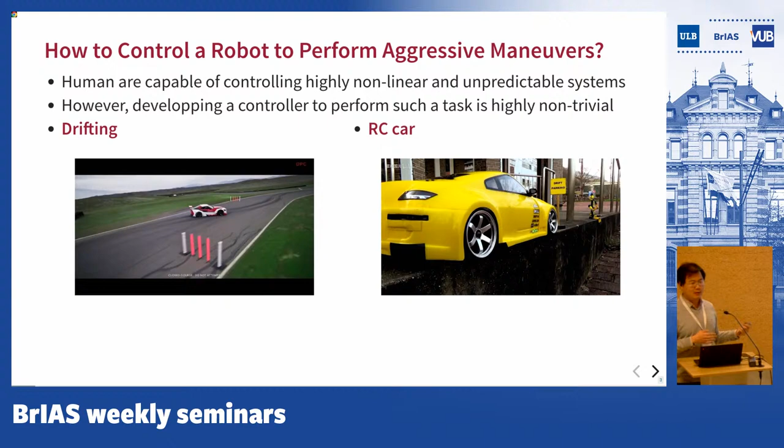We are actually interested in how to achieve this on an autonomous robot, because back in China we have collaboration with some autonomous driving companies, and they are interested in how to safely control an autonomous car on a slippery surface. For example, if you have heavy snow or an icy surface, you want the car to be controllable, not hit other people or stuff.

So if you look at the traditional control approach, if you want to have such a very agile system, the default thing we want to do is so-called Model Predictive Control.

So I can skip a few slides and give you some intuitions behind these sorts of controllers. Typically in a control task, we need to deal with two things. One is we want to minimize some cost. The cost is basically—this x is the state of the system. For example, you can consider the speed of the car and its heading, its position, as the state.

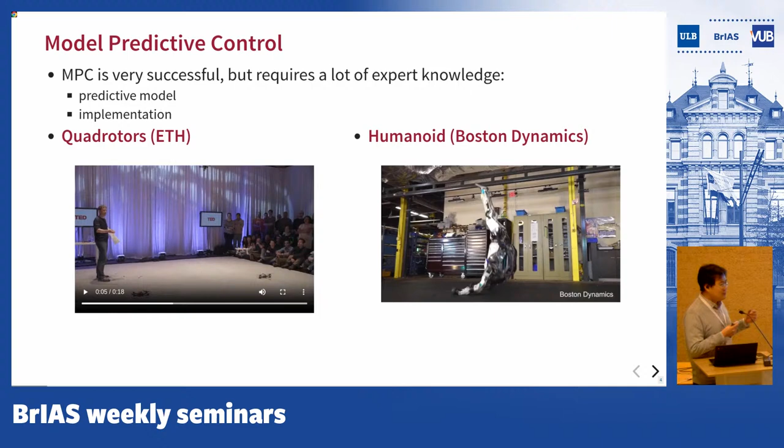Another problem is how do you implement this controller, because you are really trying to solve an optimization problem online, and usually you need to solve it at a very high speed, like 50 Hertz. So whether you can really solve a very complicated problem online in real time, that's also very challenging.

So nowadays, people are trying to move to this reinforcement learning based controller. Usually people use so-called deep reinforcement learning to learn a neural network that tries to control these kinds of robotic systems. For example, this was done by OpenAI, I think in 2019.

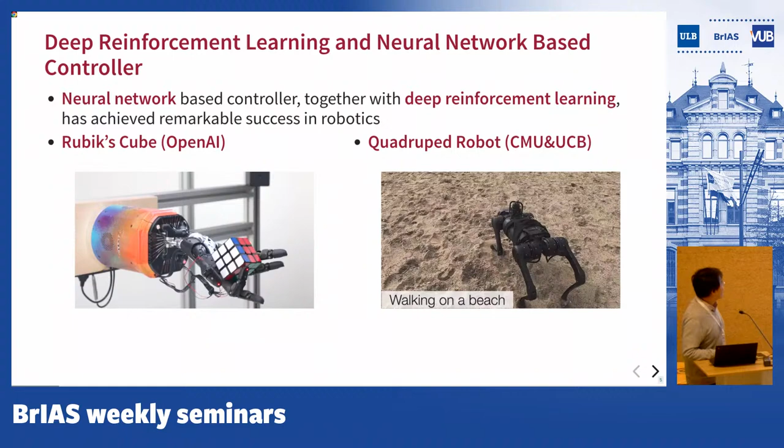For all these problems, it's actually quite challenging to solve using the traditional MPC-based approach, because you don't have a very good predictive model that can tell you what will happen next. So this is why reinforcement learning has been remarkably successful at solving all these kinds of problems.

And we actually did something in our lab. So this is what we did for controlling a car in a drifting maneuver. Here you can see we can do a figure-8 shape, and we can also do it consecutively like this.

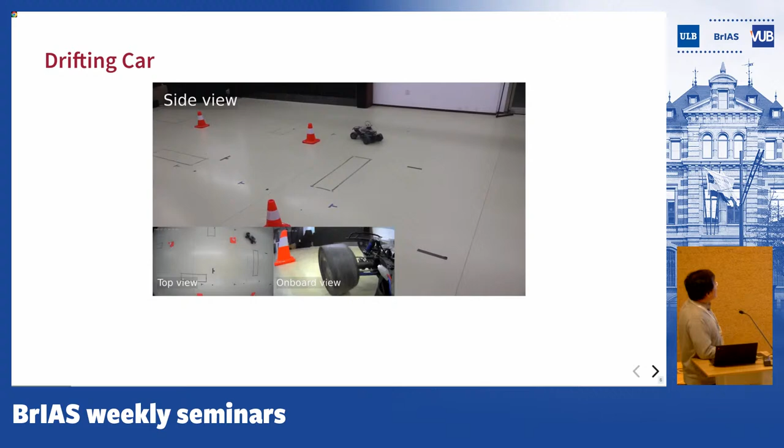And there are some other robotic projects we've gone through in our lab. I think these might be more interesting than a lot of formulas, so I'll show them here.

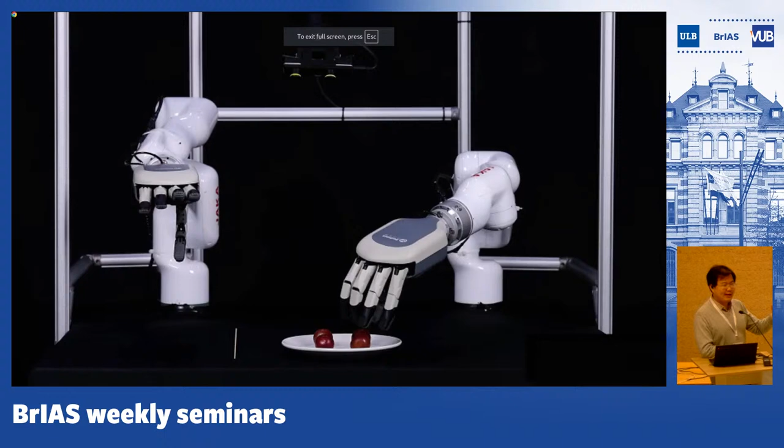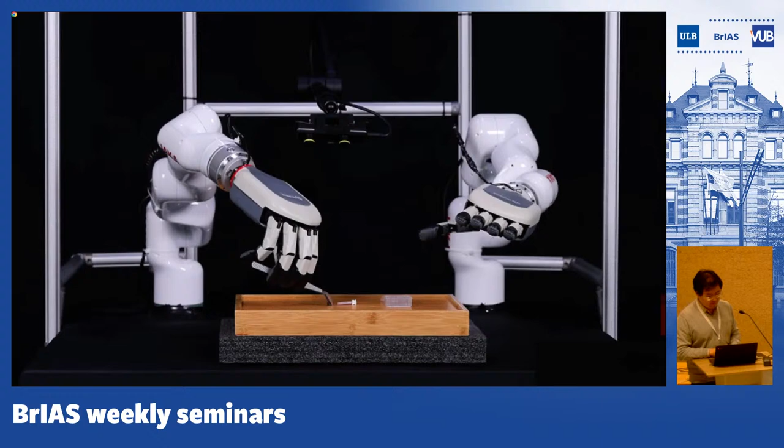We also did something with a robotic hand. This is done by teleoperation—there's a person wearing a glove and VR glasses. He sees what the robotic hand sees, and the system maps the motion of his hand to the robot hand here. We've done some projects for this kind of manipulation task.

Like I said, we've done a lot of things using reinforcement learning, and there are also a lot of other very successful stories using reinforcement learning for robotic tasks. I think people are now trying to consider why we need reinforcement learning, and there's a very good observation from a paper from the University of Zurich, which they published in Nature, I think in 2023.

The title of the paper is Champion Level Drone Racing. They develop a reinforcement learning algorithm that makes an autonomous drone actually race faster than a human pilot.

What they observe is that the fundamental advantage of reinforcement learning over, for example, optimal control is not that it can optimize better, because optimal control, as we know it, is optimal. Regardless of what problem you send it, it should give you the optimal solution. But in reinforcement learning, as we find out later, you can put a lot more objectives into the learning framework, so a lot of times it will be able to optimize a better objective. So that's what we observe.

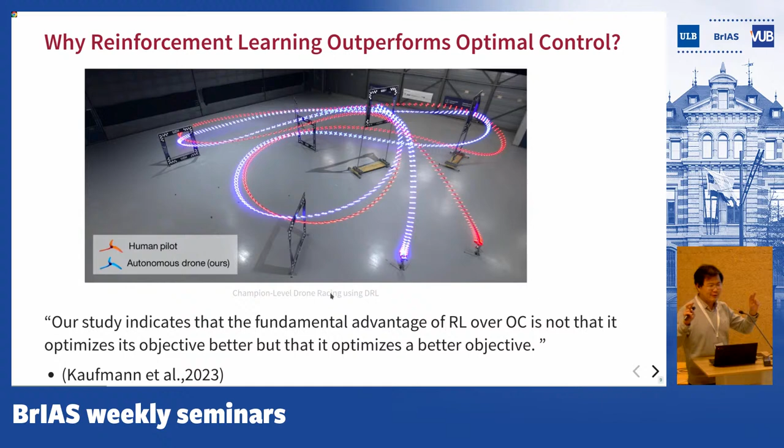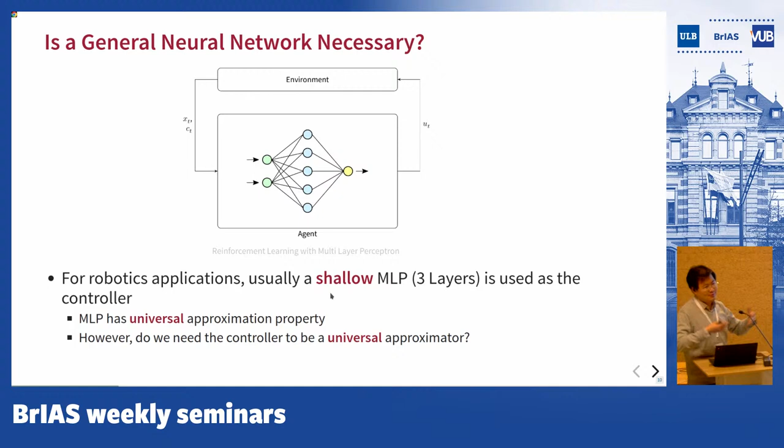If you look at all these robotic neural network controllers, they are usually just 3 layers. It's a very shallow network that people probably could train back in the 1990s. So it's not really deep at all. That brings a lot of question on whether we should really use a neural network, because it's not like a huge transformer that is doing all these control tasks.

If we go back to the control literature, we can see that people are using different terms other than learning to describe different kinds of controllers. For example, if you have a control background, you know one very famous controller called the PID controller. It probably solves 95% of all control problems. It has 3 parameters that can be learned, or you can also call it self-tuning. This was developed by Professor Karl Astrom back in the 1970s.

You can also have what we call a linear feedback controller, where my control is just a linear function — this K is what we call control gain, a linear function of my current state. There are a lot of ways to learn this kind of controller as well. And of course, there are people working on learning this so-called model predictive controller. You can think of all these things as potentially learnable: the cost function, the predictive model, the constraints, the terminal constraint — all of this you can try to learn.

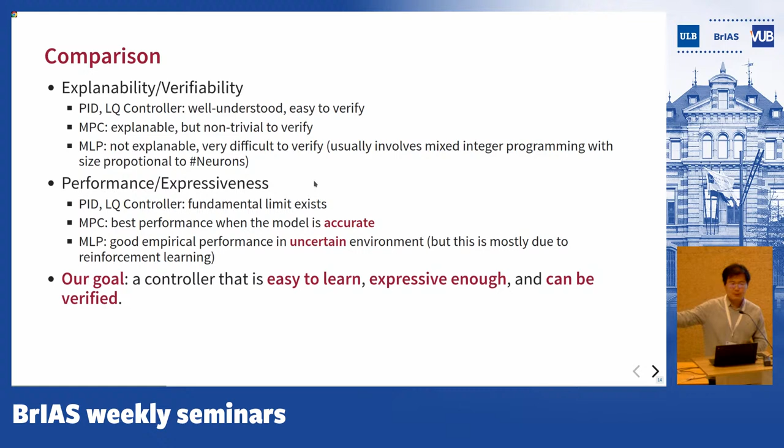So what we see here is actually there will be a spectrum of things that you can tune or learn, whatever you call it. On one side you have this very simple controller — PID, or this linear controller — that is very easy to understand, even if you don't really understand the learning algorithm. As long as they give you a linear controller, it's very easy to verify that this controller is stable or not. On the other hand, you have this so-called neural network-based controller that nobody really knows what it is doing. There's a little bit of work on how to verify this, but the complexity is really high.

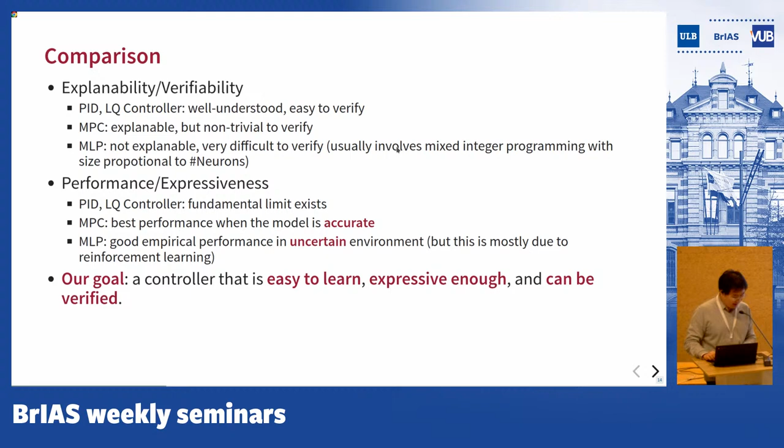So in reality, you cannot do anything about it. And there will be something in the middle, because we know all these simple linear controllers have some performance limitations — there are limitations because the control laws are very simple, so they're not expressive enough. So our goal is to say whether we can find the correct balance. This is more like a very old-fashioned machine learning approach, where you want something to have the correct structure, the correct complexity, so that it's expressive enough but not too expressive that it's very difficult to verify. So that will be the focus of our talk.

So now I have to go through some mathematics. In fact, the title of the talk is a controller inspired by MPC. So if we go back to this MPC formulation, and if you are not really from a control background, you can just think of it as a huge optimization problem.

So here, really, the thing you want to optimize is the future control input. You want to know what kind of control I need to add in the next n steps in order to

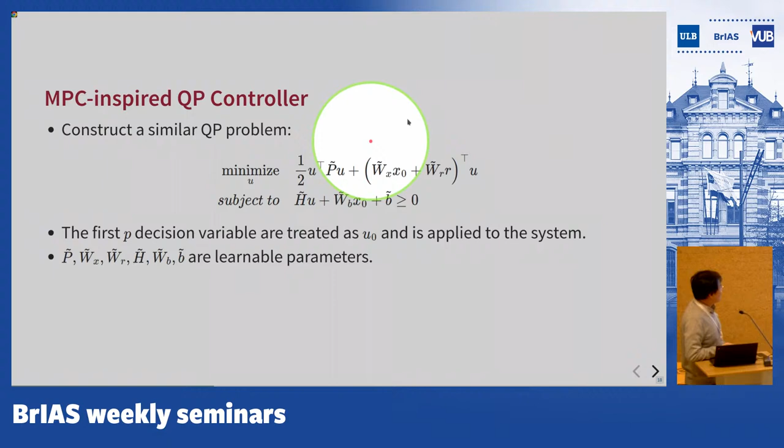And if you want to do that, what you really need to do, if you look at all the learning framework, what you really need to do is you need to calculate this. You need to basically make the controller so-called differentiable, meaning that you need to be able to calculate the derivative of my optimal u

with respect to a little bit of change in my parameters. So if I change all these P, W, B matrices by a little bit, how much will my control U change? That's the thing you need to calculate. Once you've done that, basically everything will work. You do a backward propagation and calculate the policy gradient, and yeah, everything will work as long as

you can compute this. And if you are familiar with optimization, this is called sensitivity analysis. This means how much the optimal solution of an optimization problem will change if my parameter in that optimization problem changes a little bit. And classically, if you want to do sensitivity analysis, this is usually done through KKT conditions.

Some people go through that route, but it's very difficult because, for one, if you want to find the KKT solution, it's usually very time-consuming. The other is sometimes you learn a problem that is infeasible, and at that time, this KKT condition—you cannot solve the KKT condition because the problem becomes infeasible.

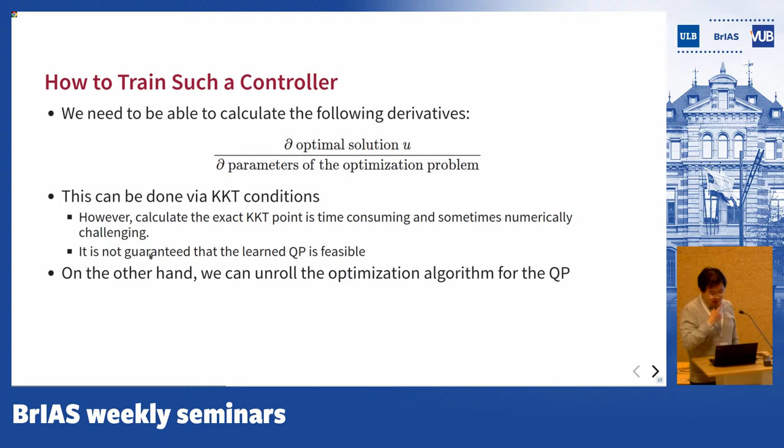So what we do here is what we call unrolling. So instead of going through the KKT, we look inside at how you solve this QP problem.

And usually, if you are familiar with the optimization literature, there are a few ways to solve the QP problem. You can do Newton's method, that's the second order method. So for example, the famous interior point method will fall into this category. And for QP, you can also do the so-called active set method, meaning that you find which constraints are active and which constraints are not.

All these other methods are a little bit more complicated, so we will be looking at the so-called first order method. Let me introduce you to a very simple method called projected gradient descent.

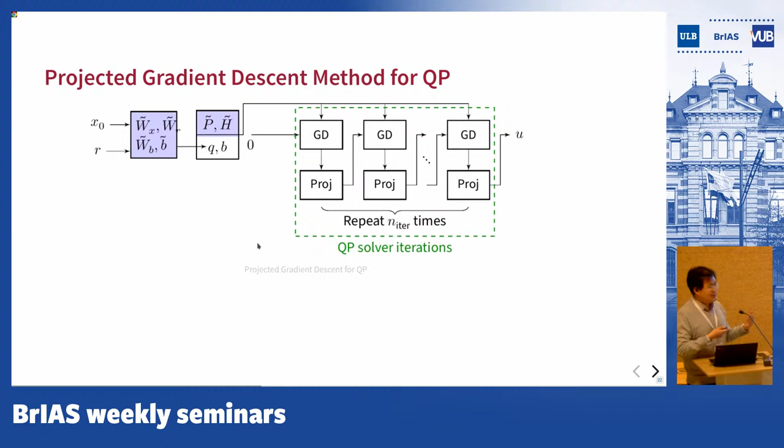So in optimization, you call it gradient descent and projection, but in neural networks, you just call it an affine layer and ReLU. You continue to do this until you converge. So this is nothing but a very classical recurrent neural network. It is recurrent because all the affine layers are essentially the same — we are doing the same gradient descent step.

So we will have something like this. Of course, this is one algorithm to solve the QP, that is projected gradient descent. But if you look at other algorithms like ADMM, PDHG, eventually you will most likely arrive at something like this — it's just that the affine layer and the ReLU layer are slightly different.

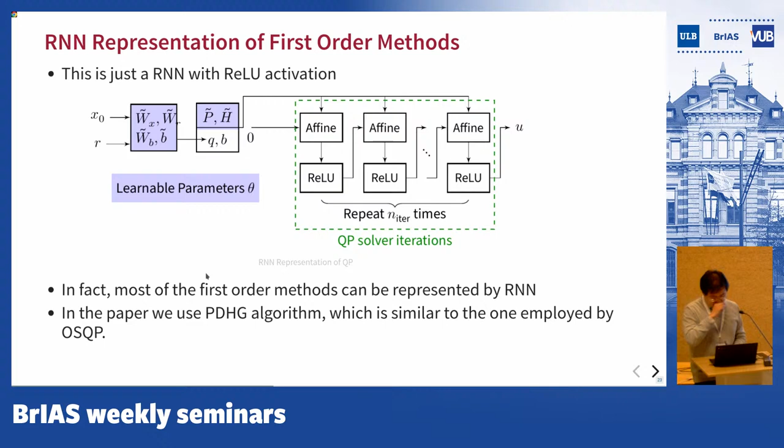At that time, we essentially get two things representing the same controller. On one hand, we say our controller is actually an optimization problem of this form. On the other hand, we say our controller is actually a recurrent neural network. It also has some structure built inside, because all these parameters need to be put in a certain way — some parts are 0, some parts are positive semi-definite, so you need to have some structure there.

These two things are more or less essentially the same thing. If you iterate for long enough such that it converges, it will essentially give you the same thing. But because we have two representations, we can leverage the benefit from both.

On one hand, this neural network, we can just throw it into PyTorch and all these reinforcement learning frameworks, and it will just work. You don't really need to write any more code to learn all these parameters, because all the backward propagation is already done by PyTorch and other learning frameworks.

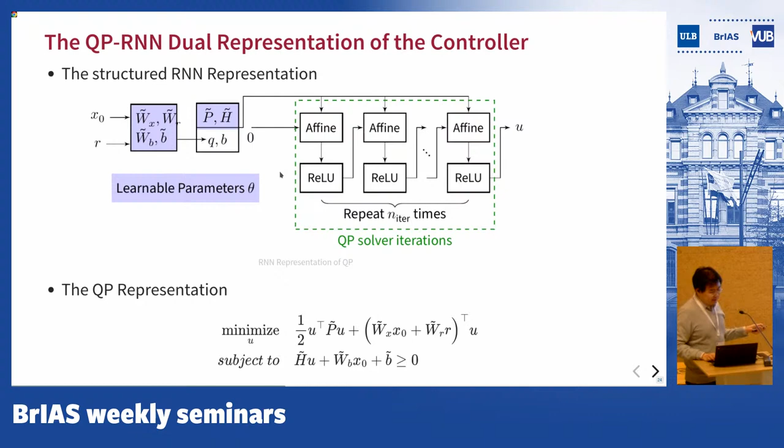On the other hand, once you have this, you can recover this QP representation. You can go back to the optimization problem saying, now I have a very compact representation of my controller, probably I can do certain things. For example, in MPC, what we care about is the verification of the controller. So that goes back to the title of this talk. If I have a very compact QP representation, what we can do is try to do certain verification. But because this is very control theoretic, I will just give you a very brief idea.

If we want to verify the controller, there are two things we need to prove. One is the controller will be so-called asymptotically stable, meaning if you start at a certain point, you will always go back to 0. That's called asymptotic stable. But because the controller is based on an optimization problem, an additional thing you need to verify is whether that optimization problem always has a solution.

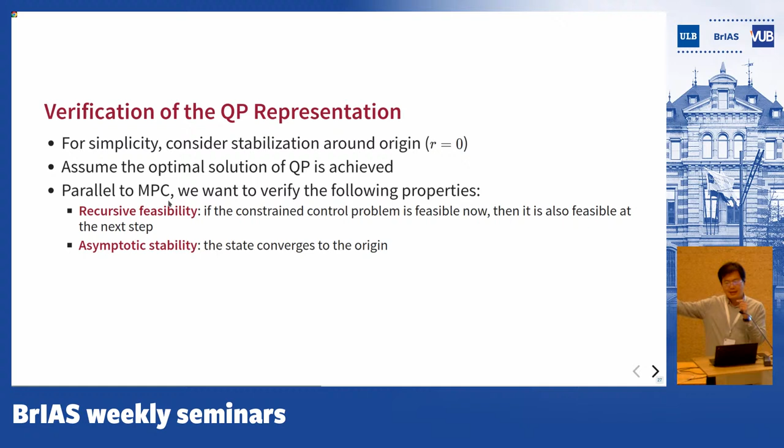If at a certain point this optimization problem is infeasible, then you run into trouble. So you'll also need an additional thing called recursive feasibility, meaning that if that optimization problem has a solution now, it will also have a solution at the next step. Then you can use induction to say this one will always be stable, something like this.

If you look at recursive feasibility, you run into something like this. Basically we want to say if the optimization problem starts within this polytope, it will always remain in this polytope, and this polytope will satisfy all the safety constraints. That's one way to prove that the optimization problem will always be feasible. So you end up with a problem like this.

This will be a non-convex so-called QCQP problem, meaning quadratic constraint, quadratic programming problem. If you can solve this problem and find the solution is non-positive, then you prove that this set will be so-called forward invariance. So you will always stay in this set, and you will always have feasibility.

I will not really go into details, but you can see that this quadratic programming representation of the control is actually quite important, because we need something like this in order to convert all the proof into a big non-convex optimization problem. Similarly, you can prove stability in this manner—you create another optimization problem based on the controller you learned, and then you can do this.

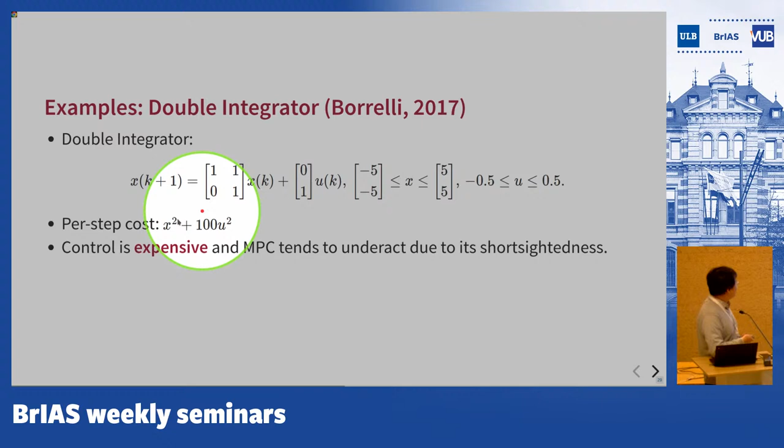You have some constraint saying that the velocity and position of the car need to be constrained between +5 and -5. You can visualize it as the car on a table, and if you go too far, the car will fall off the table. You also have some limit on how much brake you can apply—so you can only apply this amount of acceleration and deceleration. And also, very interesting in the cost, is that braking is very expensive, so you have a huge penalty on how much brake you apply.

So if that is the case, I need to introduce you to the concept that for the car, the safety region is not really this whole region. Meaning that if, for example, I'm here, although I haven't fallen off the table, maybe I'm going too fast and I cannot apply an infinitely large brake. So even if I haven't fallen off the table, I will inevitably fall off in the future. I pass some point of no return, right? So the concept is that the safety region is not really this whole table.

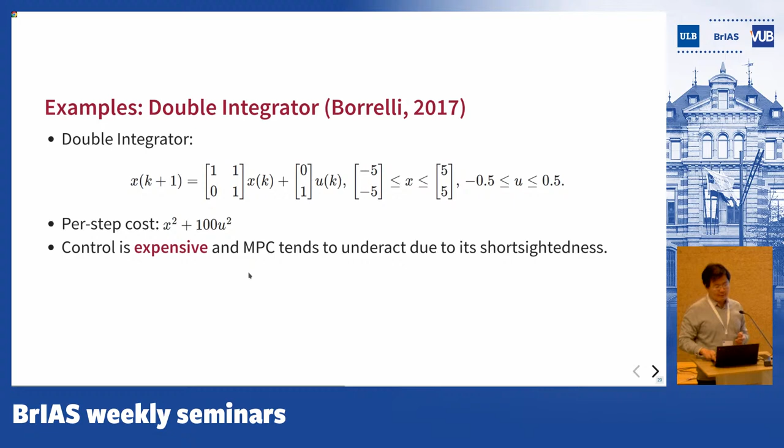So if you have a very short looking-ahead horizon, then the MPC will do something like this - even though you have some strategy to stop the car, because you don't look far ahead, you don't realize there is danger ahead, you won't hit the brake fast enough, so eventually you will fall off the cliff. That's what happened for the MPC.

But for us, because we are training this controller using reinforcement learning, and in reinforcement learning we can set a time period to be like 300 steps or a very, very long time, we are actually able to overcome this short-sightedness. So for example, even when MPC fails, we will be able to drive the car back to the origin.

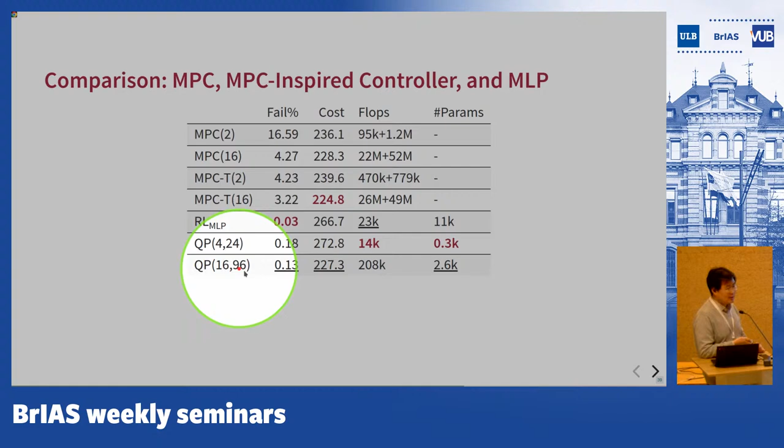On the other hand, if you look at all these learned algorithms, we use RL to learn a neural network. These are the QP controllers that we learned in our proposed QP controller. So here we have some parameters. This 4 basically means the same size problem of MPC as a 4-step look-ahead MPC, and this 16 means this QP problem will be the same as the MPC problem of 16 steps look-ahead. And you can see that the fail percentage is very small, because essentially we are looking much further ahead than the MPC, and the cost is similar.

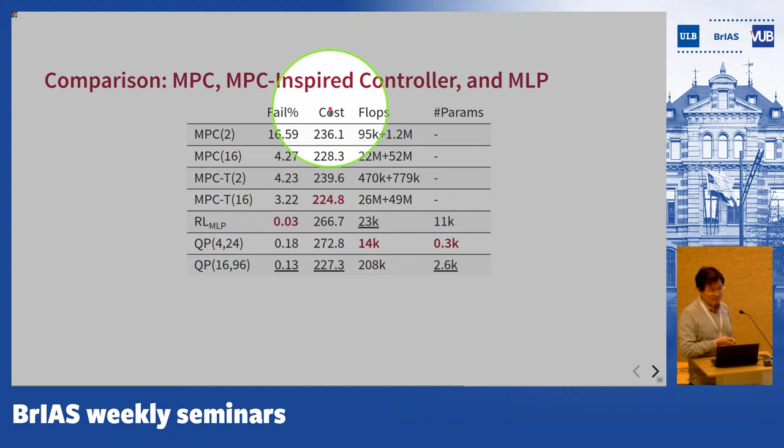So here there are some caveats, meaning that the cost, if for example the experiment fails, then the cost will be accumulated, but the accumulation of the cost will be stopped at the time they fail. So if you fail a lot of experiments, your cost will definitely be smaller, because you early terminate the whole process. Okay, so you will see that QP has similar performance as MPC in terms of cost.

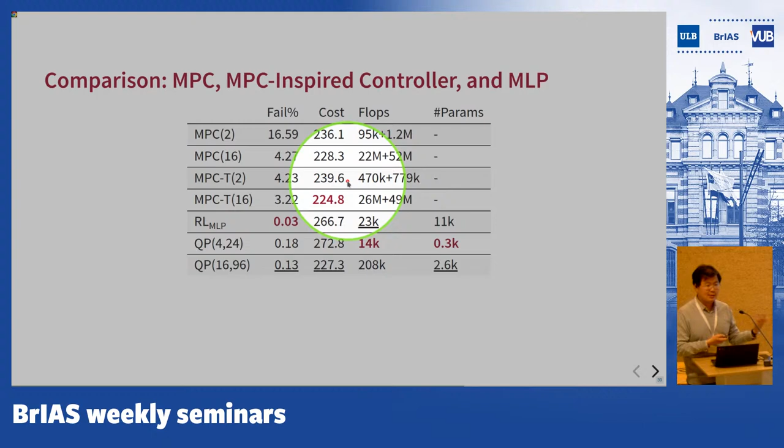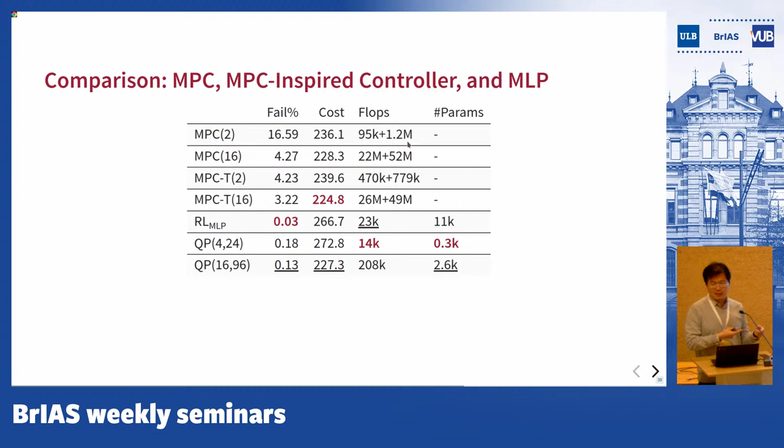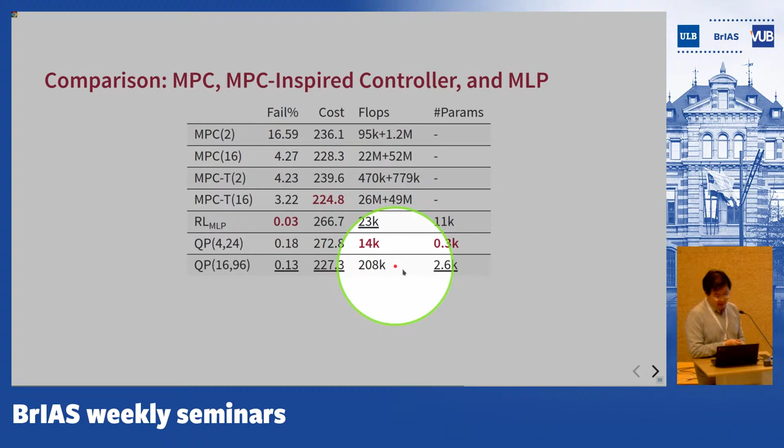But MPC, because it's solving an optimization problem, a lot of times the optimizer doesn't really... you don't know how many iterations you need to solve that optimization problem. So you can see that the computation is not fixed, you don't know how much computation you need. But here we implement this using a neural network with a fixed number of iterations, so the number of computations is actually fixed. You can see these numbers don't fluctuate.

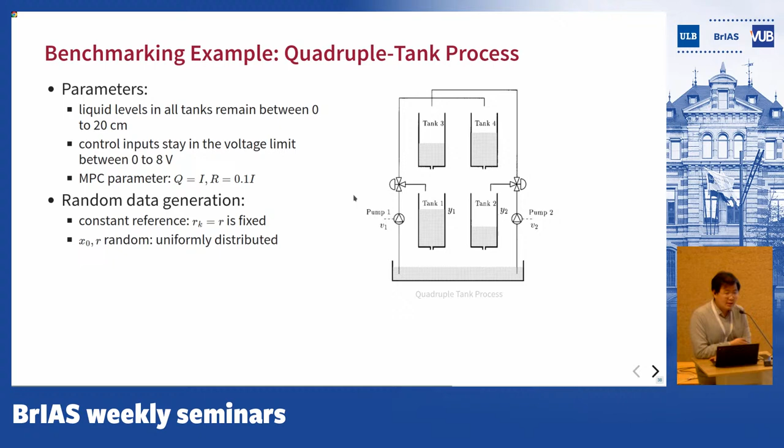On the other hand, this problem is actually quite favorable for MPC, because you have the exact model. And if we just add a little bit of uncertainty and stochastic noise into the system, for example we let a 2% variation in all these parameters, and add a little bit of noise, you will find out that MPC will fail almost every single time.

On the other hand, there are some ways to make this MPC robust to noise, but all of these methods have a huge computation cost, because you need to basically compute online. Instead of saying, okay, if I apply this control I will go like this, I need to say, okay, if I apply this control, because of uncertainty, I may go here, I may go here. I need to consider all the possibilities my future trajectory will go. So this will make the computation much more challenging.

But on the other hand, for all these reinforcement learning-based techniques, because we solve the robustness problem during the training phase, we are training this controller in an uncertain environment, so that during online deployment, we don't actually have additional cost in terms of computation. And also we are very robust against all kinds of uncertainties, because we have already seen these sorts of uncertainties during training.

And also, we did some real-world experiments. This is balancing a so-called inverted...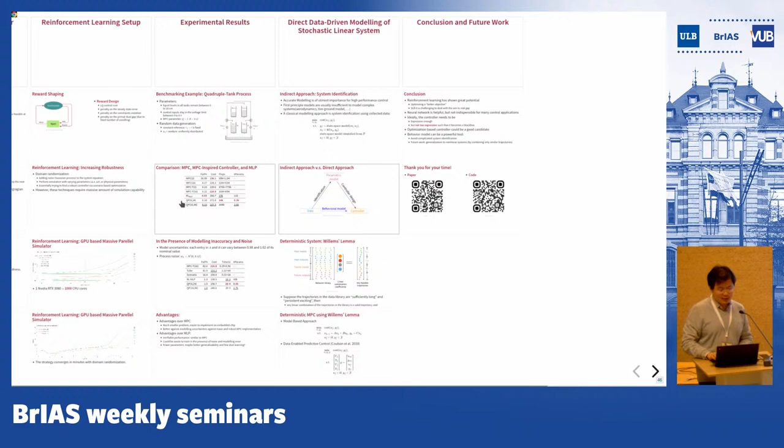One thing that is quite important in reinforcement learning is that you want the environment you simulate on the GPU to be as close to the real system as possible. Otherwise, you are basically learning to control a different system than the real one. So we want to do that, and usually it's quite challenging.

Typically, what people do in control is they collect a lot of system data, and then run an identification algorithm to come up with a model of the system. Then they try to design a controller based on this model.

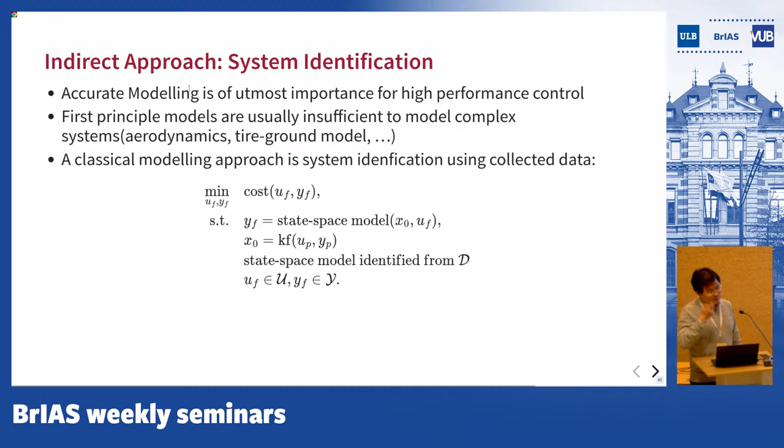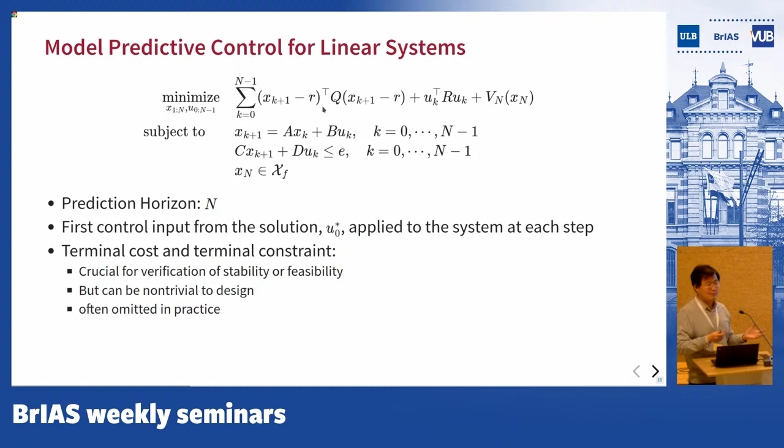In some ways it will be something like this - you will need some sort of data to fill in. If you look at the MPC problem, the important thing is you will need this A matrix and B matrix that model the evolution of the system dynamics.

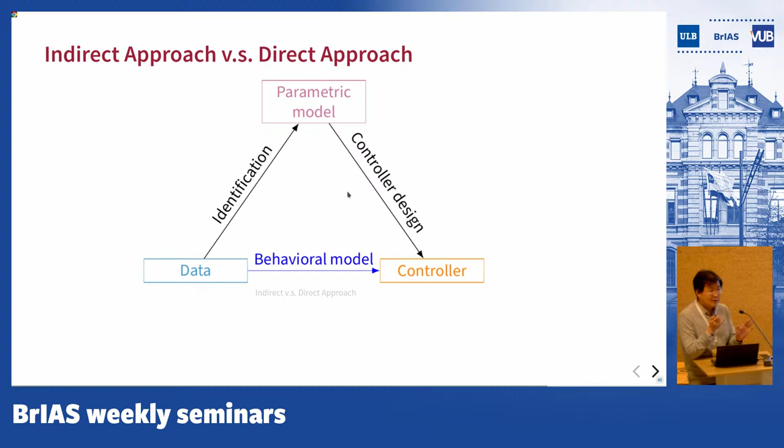On the other hand, if we want a more direct approach, instead of identifying a parametric model, we can just collect some data and try to generate a controller directly. This is for the system that has no noise.

This is the so-called Willems' lemma. It basically says the following: because we assume the system is sort of linear, if we add the system's trajectories together, we will get another valid system trajectory.

Meaning that if your control is 1, the system trajectory is like this, and if control is 2, the system trajectory will be 2 times that - the thing you get when u equals 1. So you can combine the trajectories, do a linear combination of them, and the output will also be a valid trajectory. This lemma also tells you that if certain conditions hold, then all feasible trajectories will be a combination of the trajectories stored in this library.

So the way you use this lemma is: you collect some input-output data of the system - enough data - and then you say, okay, all the possible trajectories will be a linear combination of the things I store in my behavior library. This is called a behavior model of the system.

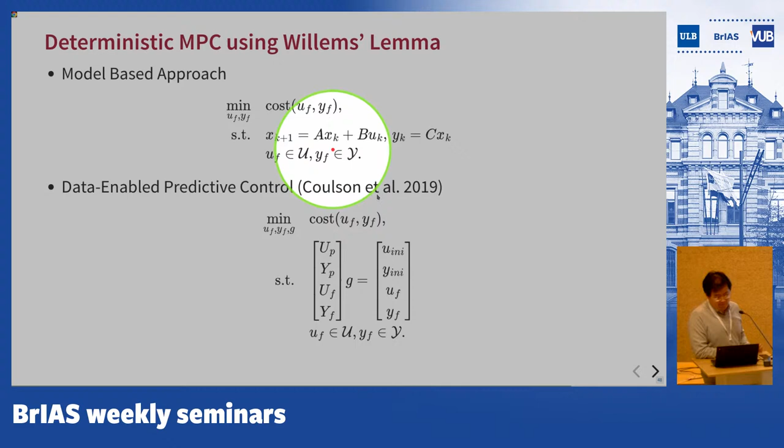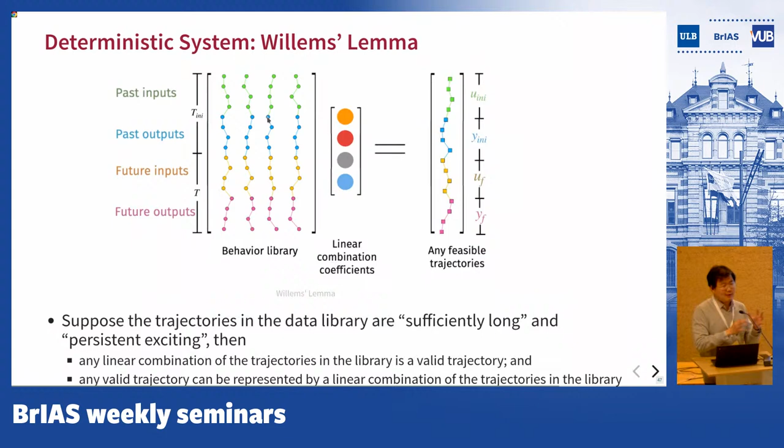So what we did here is, instead of a deterministic system, because here there is no noise, so you can just add everything together, there is no problem. But if you have a little bit of noise, the first thing is your future state or future observations will not be deterministic. Your future observations will actually be a stochastic process, so instead of a fixed one, there will be some stochasticity here. And you cannot really just simply combine this and get one trajectory.

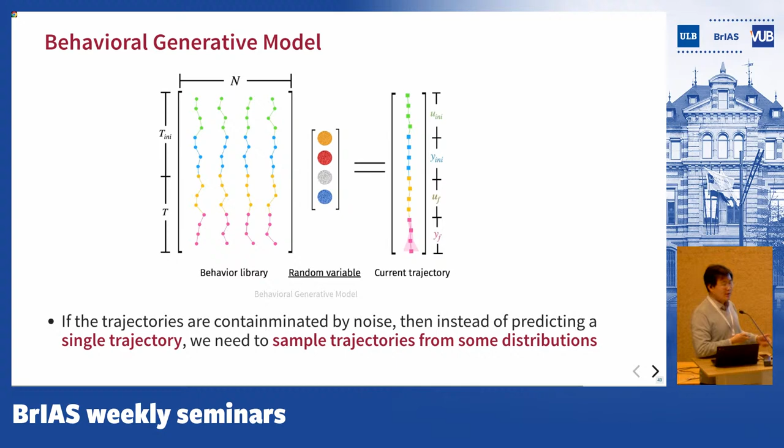Instead, you need to either model this distribution or do some sort of sampling from this distribution. So here, what we are doing is a so-called generative model, meaning we want to sample from this distribution. So instead of putting a fixed coefficient for the linear combination, we have to put in some random coefficient so that you will have some randomness. This is a little bit complicated and I don't think I have enough time, but basically you can put certain randomness inside.

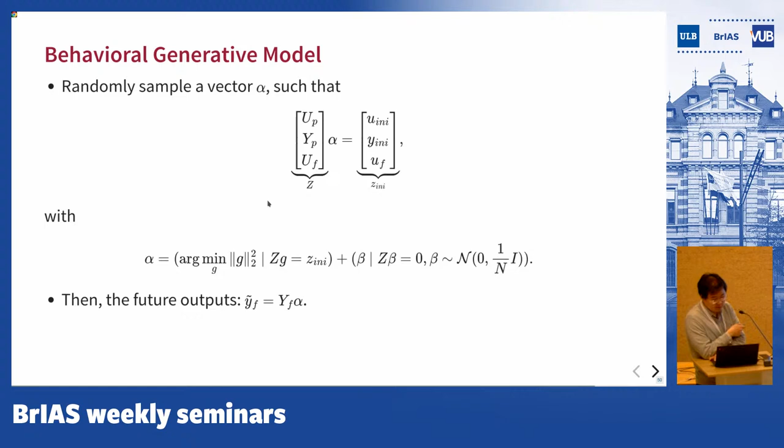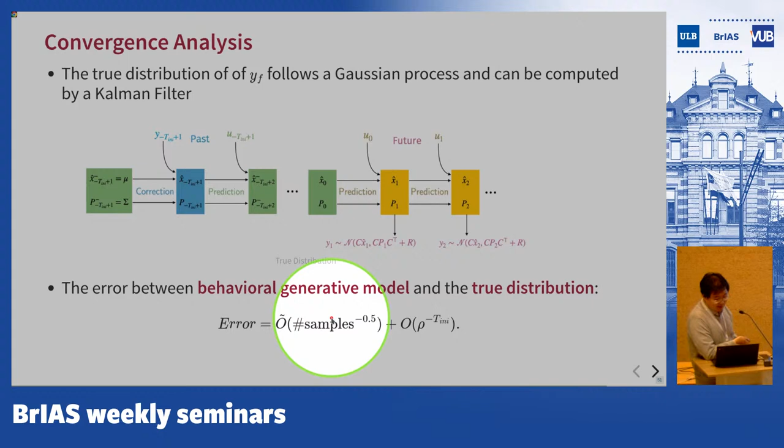This randomness will be according to a certain Gaussian distribution, and you can prove that if you have enough data and enough look-back distance, this generative model will converge to the true distribution at a certain rate like this. The number of samples, you take the square root of this number because this is somehow related to the central limit theorem. You usually have something like this, and this depends on the look-back distance.

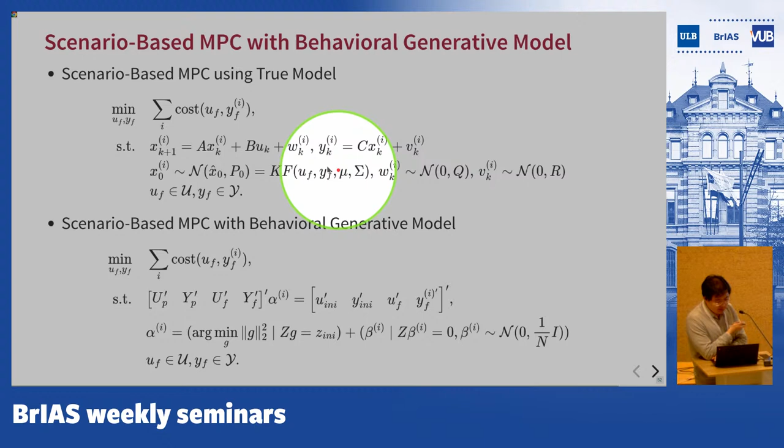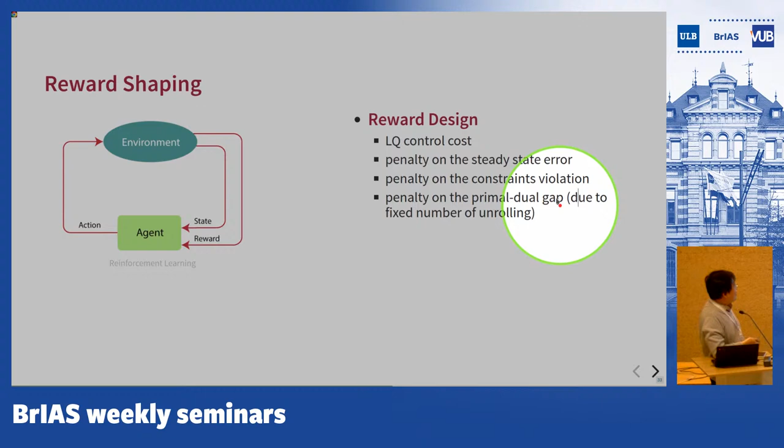That's one thing, and also here we will turn the constraint violation into a soft objective function. You can also do it other way, like using safe reinforcement learning and other things, but here we add the constraint violation.

Another thing is because we are only doing that RNN for a fixed number of iterations, it will not really converge to the true optimal. But we have some metric on how far it is from the true optimal, so we want to also penalize that.

So we don't want the reinforcement learning to cheat. You really need to learn an optimization problem instead of learning an arbitrary RNN. So these are the additional constraints, additional penalties we add to the cost.

So at the end, what you do is encode somehow the objective of the MPC controller into the reward function. Yes, so this part will be from the MPC.

Did you try to incorporate the MPC objective directly into the loss of the RL agent, not specifically via the rewards but also in the loss? This will be the loss exclusively via rewards. Okay, yeah, this part will be the loss.

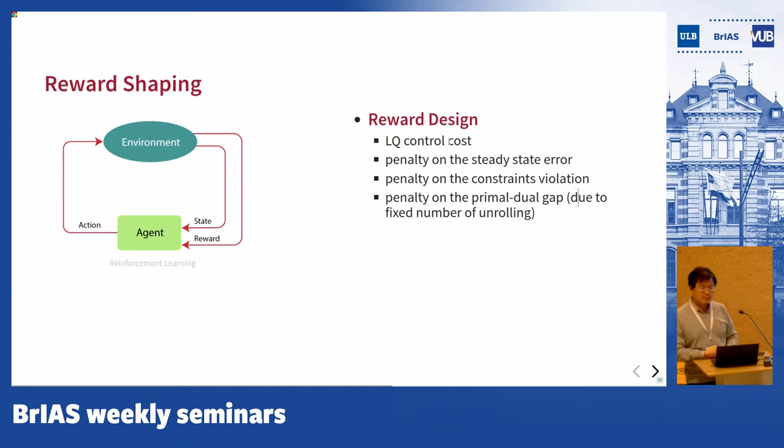Okay, yeah, thank you. Other questions? I don't know if online we have questions from the online audience. Okay, so otherwise, I can pose one.

Okay, sure. In this analogy that you are using the MPC, that is a receding horizon online optimization problem with your reinforcement learning, I was wondering why you're not getting the data offline, solving an optimal control problem with a Riccati equation after you penalize and grasp all the data and train your model offline. Why do we need to do it online, and how would you change the weighting matrices? For instance, in the MPC formulation, we have prediction and control horizons and weighting matrices. How would you change that, or how does your approach consider those things?

Sorry, let me try to understand. So your question is how to change these matrices, how to get this online? Or... actually, well, there are two questions.

The first one is why we are using MPC and not using offline data, solving many optimization problems offline considering all the constraints, why we have to do it in a receding horizon approach, and how would you involve the change. Because at some point you mentioned your approach considers a longer horizon, so that is a reason why you can foresee constraints in an easier way. So how can you cope with the change of the prediction horizon, control horizon, and weighting matrices within the MPC in your approach?

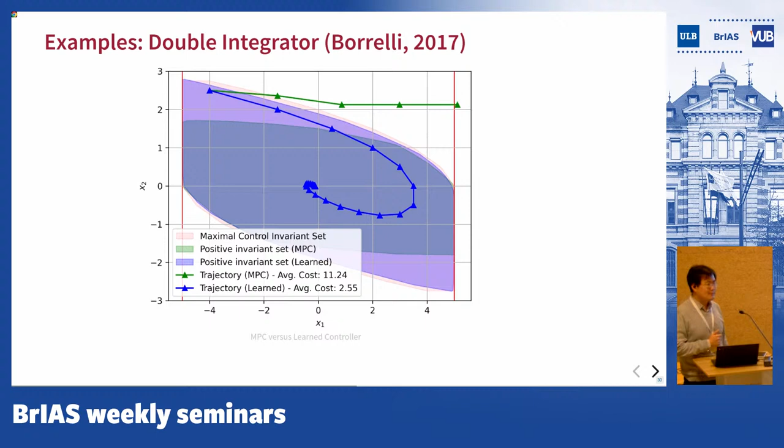When would you still suggest to use MPC and not your proposed methodology? Because in the results you've shown, MPC is worse, but it cannot be worse in general. I think the thing is, if you really need a very serious kind of verification...

Because for MPC already it's very difficult to verify. For us, I think it might be slightly more difficult to verify, because for this problem it's really a non-convex problem, and somehow you have to initial-guess what is this invariant set. There are a lot of problems like this. It's kind of non-trivial to say whether this controller's verifiability is an issue.

So if you really need a very formal verification, if you are in a very, very safety-critical system, maybe it's better to use MPC. But I'm not sure how much more difficult this one is to verify. The other thing is MPC is still a little bit more explainable.